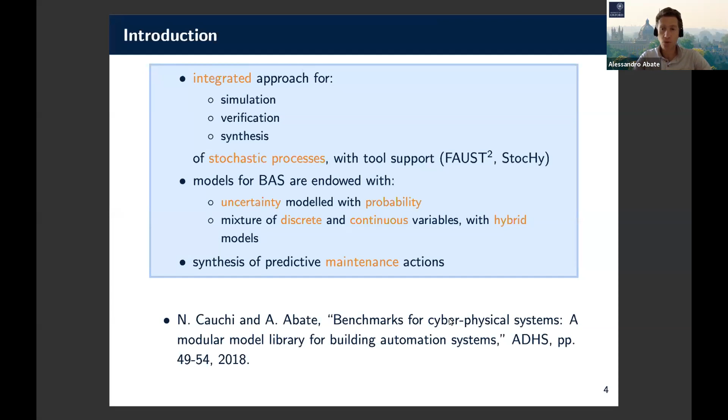System in the smart energy domain. And we have developed an integrated approach to simulate these models, but also to verify them or to synthesize policies, strategies, or controllers to achieve many certification objectives.

We use models that are both hybrid, as I mentioned before, namely appropriate for cyber-physical systems, as well as stochastic. Stochasticity is in particular used to model uncertainty. And uncertainty can come from various aspects, the way that these buildings are used, or perhaps the dynamics of weather.

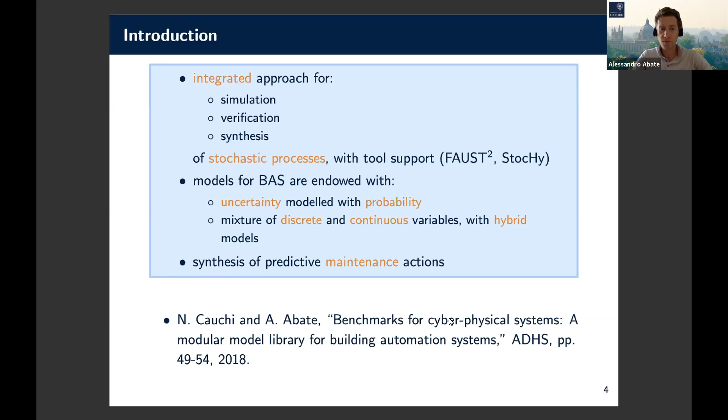We have tool support, so we've developed in particular two toolboxes, FAUST² and StocHy, that do these verification and synthesis, as well as simulation goals. We have also developed a few studies in synthesis of predictive maintenance actions, and this is what I'm going to talk about in the context of today's talk.

So here's a first intro about biomass boilers. So we have boilers that burn biomass like pellets, for example, hopefully not coal or wood, and they generate heat. The functioning of such biomass boilers leads to the buildup of soot, namely black powdery dirt, which clogs pipes of these biomass boilers, and that leads to a decrease in efficiency of their operation.

Maintenance ought to be done, and it ought to be done in a couple of ways, either by cleaning these pipes, or perhaps at times by replacing parts of the overall biomass boiler device. And in particular, this cleaning can be done by high pressure blowing of some liquid within the pipes.

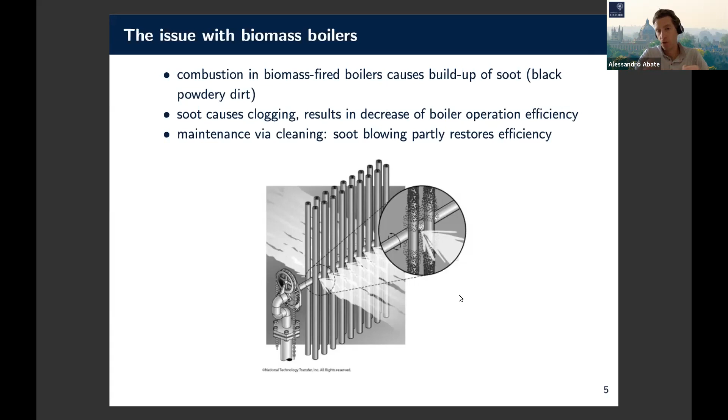So it's interesting to know that cleaning and maintenance or replacement can be done either online or sometimes offline. Offline means that you have to stop the biomass boiler, take it offline, replace your part. Cleaning can be done both online and offline, and this will have some repercussions, as we'll see in a few slides.

So the goal of this talk is to compute an optimal, and I'll tell you what optimality is, cleaning or replacement strategy or policy or control that minimizes overall costs. Costs will comprise the operational costs, so how much it costs to operate such a biomass boiler, as well as maintenance costs. So we'll need to find a trade-off between them. Later, I'll also introduce discomfort costs, namely costs to the users of these buildings.

We'll comprise a model with two variables. One, eta, will encompass the performance of the biomass boiler, or equivalently, or dually, I would say, the degradation of its operation. The second variable will comprise demand, so heat demand, which evidently depends on the outside temperature and humidity.

We'll build a model that is fed from data, and will synthesize in a closed loop a controller that affects the dynamics, the evolution of this model. And the synthesis will depend on a cost, again, which will comprise maintenance and operation.

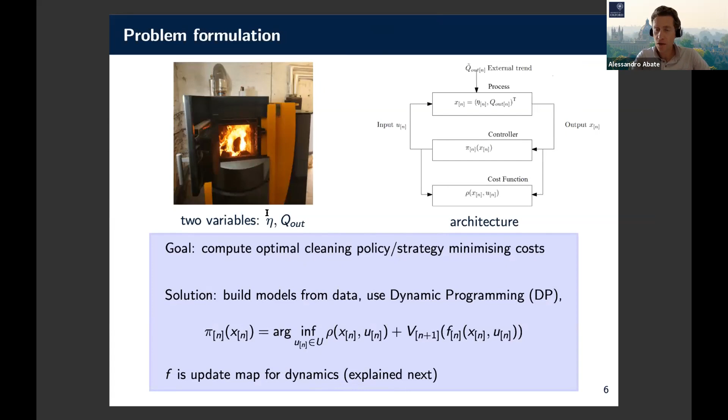So what I'd like to do now is describe the dynamics of this model, in particular dynamics of the two variables of this model, the demand, Q out, and the performance or the degradation, actually, eta. So the model of the demand, well, we developed actually a bunch of models. So this is the simplest one. It's fed by yearly data, so historical data. This is this tilde Q out function, which is here represented by these red dots.

And it has an autoregressive feature, namely it has a one-step memory. So the demand at the next time step, whether it's a week or month, is a function of the current demand plus the sort of historical data that comes in, right? So it has a one-step memory. It's a very simple model.

Evidently, we built higher order models with larger memory in case, for example, there's some periodicity in the demand. And this will be a more complicated version of this first order autoregressive model that I just described. So the takeaway point for this simple model of demand is you have historical data, you can punch it up, you use it to build a model for demand.

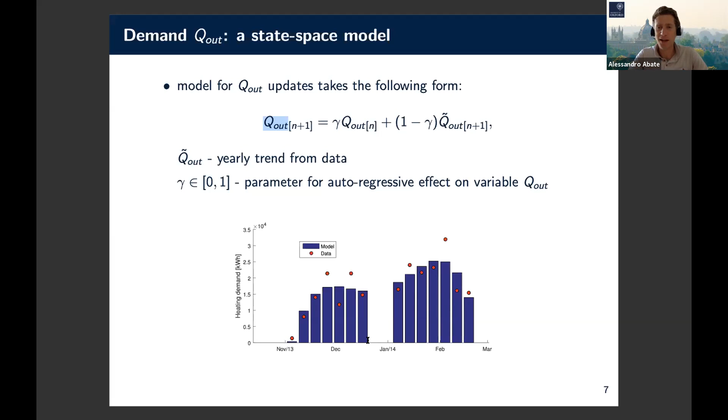And as you expect, this model will give you more demand in the middle of the winter, less demand, if at all, during the summer. And in particular, will give you no demand, say, during the Christmas break, as you can see here from the data we have.

The second part of the model comprises the efficiency. Actually, eta is a parameter that encompasses that. So the efficiency can go from a minimum to a maximum level, usually between 0 and 1, respectively. And the efficiency is updated across time, time being, again, either every week or every month, depending on how granular your model wants to be.

In a way that is, again, autoregressive, so it has a one-step memory and depends on whether or not you have made a maintenance action. So action is u_n and tells you whether you have made maintenance or not. In particular, in this case, we assume that whenever we do maintenance, we bring the efficiency up to the maximum level.

Otherwise, if we don't do maintenance, then depending on how much demand there is, our efficiency decreases in time with a parameter alpha that we have fit, that we have regressed from data again. So the idea is that if the demand is high, then the efficiency decreases. There's more soot building, if you will. If the demand is low, then the efficiency doesn't decrease. In particular, if it's equal to 0, then the efficiency is the same because the biomass boiler isn't used, right?

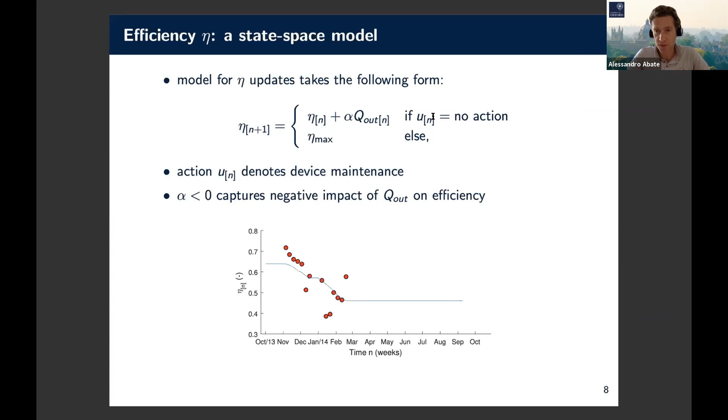Great. If we want to synthesize a controller, we need to have a goal, a task, or a cost. If you have a cost, you want to minimize such cost. Such cost is a monetary cost that encompasses two components, an operational component and a maintenance component. The operational component is how much it costs to operate this biomass boiler. And in particular, if you have high degradation or low efficiency, so if this parameter eta is low, you're expected to pay more because the biomass boiler isn't very efficient. So you have to exert more input, if you will, to heat up your environment. The pipes are clogged, right?

Intuitively. On the other hand, you have maintenance costs, which are incurred not continuously, that is every time you operate the biomass boiler, but only once in a while, when you replace or clean, if you will, the biomass boiler, in particular when you exert a maintenance action. So notice that here we have a cost and dynamics that encompass two time scales. We have operational costs that you incur every time you use a biomass boiler, so every week, if week is the granularity of your model, and the maintenance costs, which happen only once in a while, maybe once or twice a year. So it's a model with different granularity, different time scales.

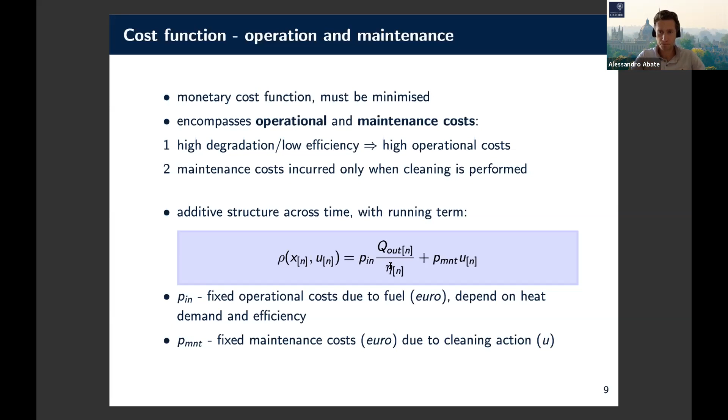Intuitively, these syntheses can be done with dynamic programming. Dynamic programming boils down to taking a value function and updating it backwards in time. The value function is updated at the end, usually with no cost, because at the end of your time horizon, you perhaps have only a final step operational cost. And then you update it backwards in time by looking at how the dynamics affect, how the control affects the

costs at every time. So in particular, say that your demand decreases at the next time step. If you do no action, then your performance will degrade. If instead you do a maintenance action, your performance will increase, in particular go to the maximum. So these updates are also known as Bellman iteration. Standard, this is not anything new in the literature. We just leverage this optimization approach to synthesize our control strategies.

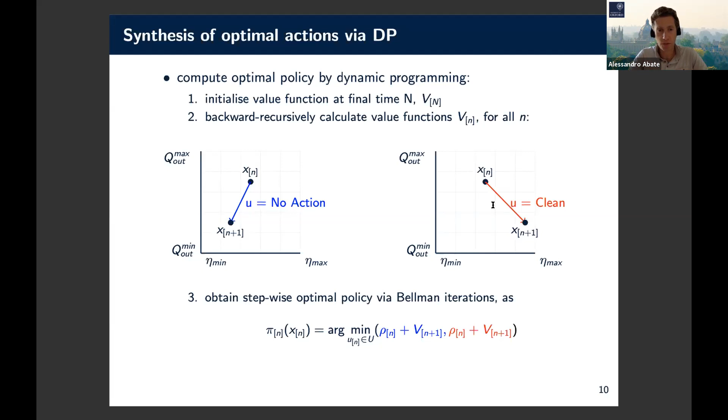Evidently, this is all periodic because it trusts a model that is periodic. As I said before, you may not want to implement your control architecture open loop for 5 years, but just do it for a few months, then recollect data, update your model, and then synthesize ahead of time, in a so-called receding horizon fashion, as I said before.

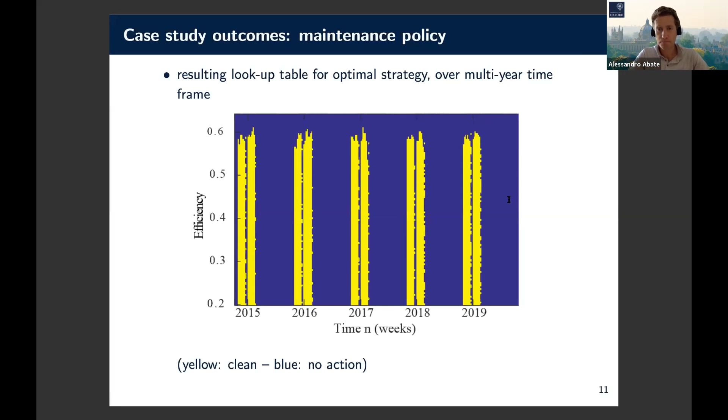The bad thing about doing it just in a way that is timely is that you don't know when to do it. I mean, if you do it every year, when would you do it? In the middle of the winter, middle of the summer, you don't know it. Well, it's better to rely on a model that is kind of dynamic, that will tell you when to do it, when it's needed, right?

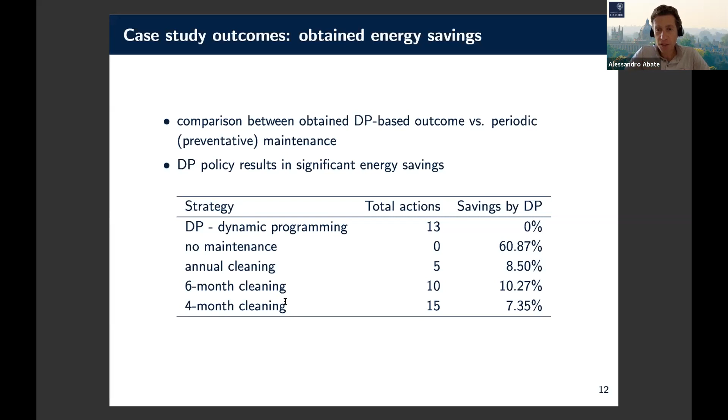So I hope that these outcomes make sense. Evidently, the overall setup is limited. In particular, you can think of extending the approach in a number of ways. So first of all, I didn't tell you whether the maintenance can be done online or offline, right? So in particular, this can be actually modeled by thinking that when you do maintenance, discomfort might increase in the sense that you need to take your biomass boiler offline, you need to turn it off, and we assume that it takes up a day to do maintenance.

Likewise, if the biomass boiler is underperforming, then evidently it takes longer to warm up and people are colder, essentially, right? So there is a certain discomfort that is a cost on users, right? So can we try to monetize discomfort, which encompasses also whether we do maintenance online or offline? So we try to do that.

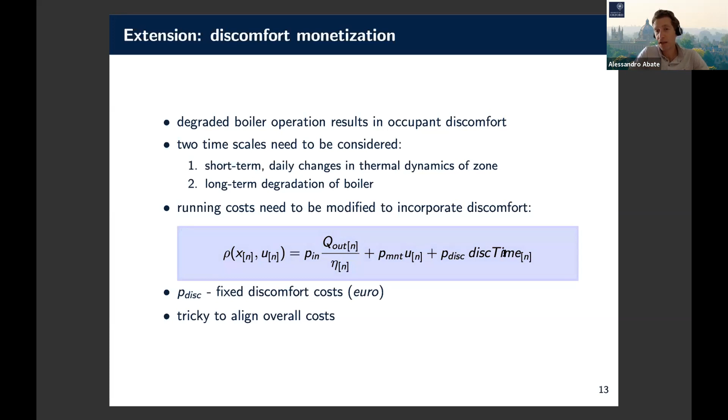So there is here a new cost, which encompasses a final term, which has a fixed discomfort cost. This is tricky to find. It needs to be a cost that is well aligned with the other 2 components, the maintenance and the operational costs. And that depends on this discomfort time factor. This discomfort time factor is something that we computed as follows. We introduced dynamics of the temperature on a daily basis.

In particular, yes, please. The time is a little bit running out, so just give it 1 or 2 more minutes, please. Will do. Thank you. Thanks for the heads up. I'm not keeping track. Thanks.

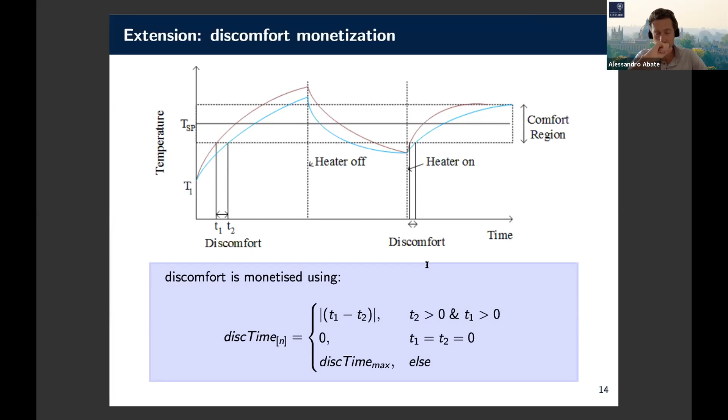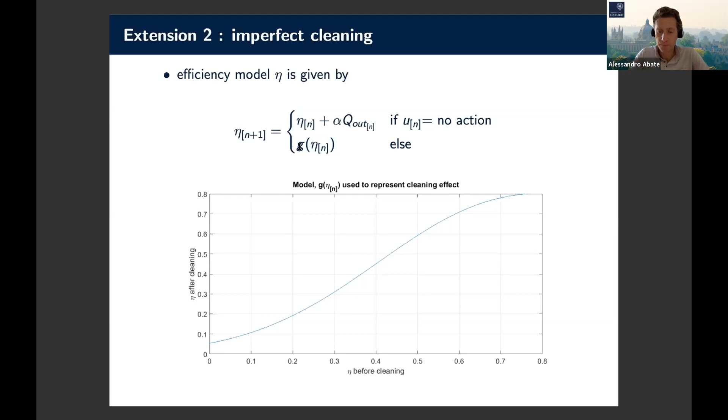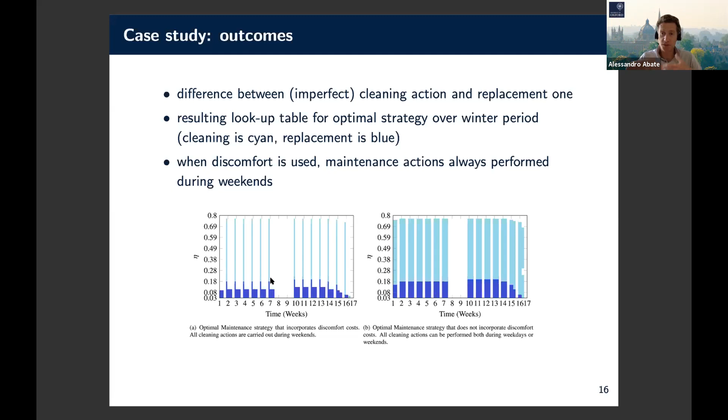If you introduce discomfort, you'll see here these thin lines. It will tell you, well, you can only do maintenance when there is a weekend, namely when the users are not there. Because if you do cleaning or maintenance during the week, then the discomfort grows. There is more cost, not worth doing it. So with discomfort, we can do scheduling of maintenance that is improved, more realistic. And in fact, we can argue that we reduce the discomfort costs.

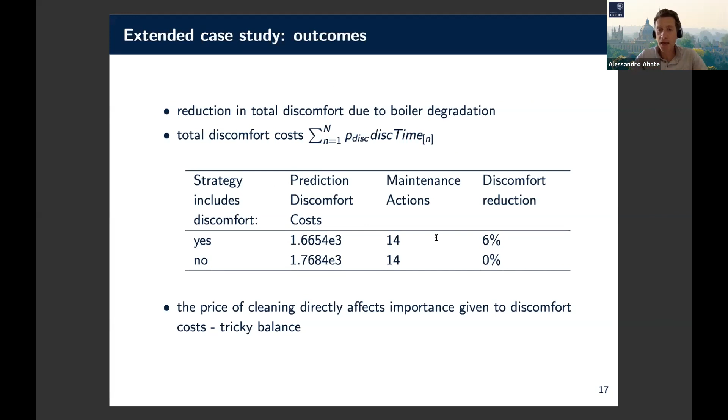The tricky part of this approach is how to monetize discomfort and how to come up with a trade-off that allows us to compare reasonably the discomfort costs with the maintenance and the operational ones. Here's the end of my presentation. I have not talked about reliability via fault maintenance trees, something that others might discuss this afternoon. But I hope, as a takeaway point, that now you know everything about this beautiful area of biomass boilers. Thank you very much for your attention.